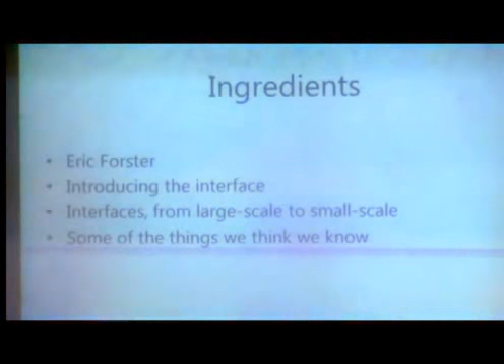These here are the ingredients of my talk today. Very roughly, I need to pay tribute to Eric Forster, so I will start with a short story about Eric, because I had the privilege of meeting him quite some time ago. Then I will introduce to you the interface, at least the interface as I see it, and maybe it's a bit broader description than you would normally have for an interface. Then I will take you on the journey from very large, big interfaces, to smaller and smaller interfaces, and try to describe how our appreciation of these interfaces changes when we go to very small size. And I will end with a listing of some of the things we think we know. So not things we don't know, or things we know, but some of the things we think we know.

But first, Eric. You know, the amazing thing was that it was very hard to find a picture of Eric. Maybe you noticed this is exactly the same picture that Andrea has shown. And for me, it was really remarkable that a person who put such an important mark on our society, you cannot find a picture of the guy. Anyway, we have the picture here.

And for those of you, the younger people here who never met Eric, Eric was really the man on liquid dielectrics. He made a lot of progress in that field, and he worked almost his entire life in industry, but he was also involved in universities. And for me, talking about interfaces, he was kind of the perfect interface between university and industry. Very important, I think, especially in these days now.

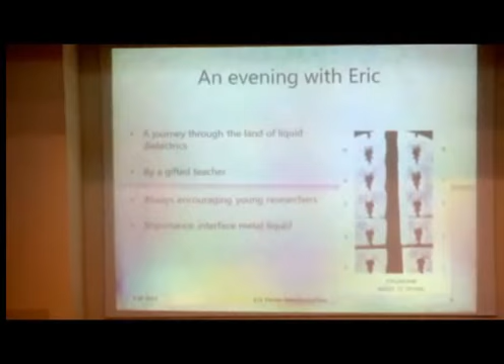When did I meet Eric? I think it was about 25 years ago, in the evening of one of the conferences. It was an evening with Eric. That sounded interesting, so I went there. I was still young at the time.

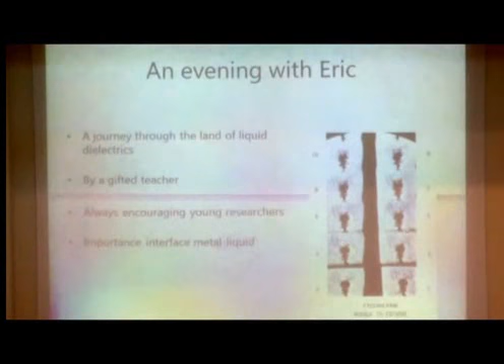Eric took us on a journey through the land of liquid dielectrics, and I was really grasped, like watching an exciting movie. Because he was a gifted teacher, always encouraging young researchers. I still remember when we met, he'd say, oh Peter, we need to talk about this, we need to talk about that, and so on.

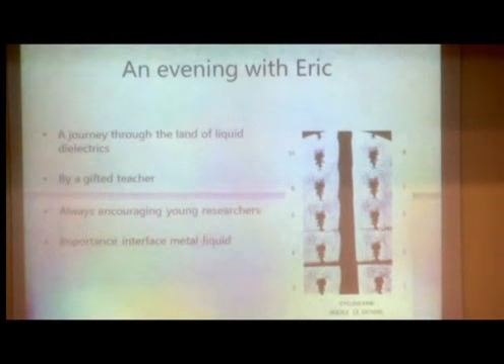He was telling us that evening about the importance of the interface between metals, between the electrode and the liquid. You see some very old pictures of the start of a breakdown process in cyclohexane, a liquid insulating material, with a needle as a cathode.

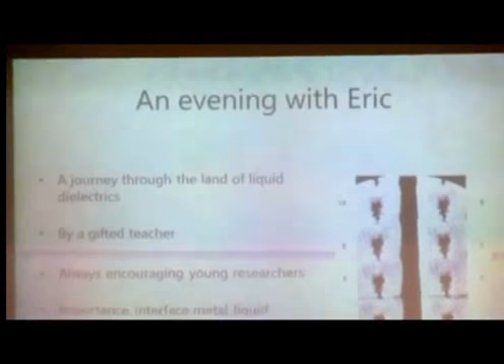After that lecture I was very much excited by the matter, and I spoke with some of the more experienced guys, and they were not so excited. They said, we didn't hear anything new. But I thought, I don't care, because it was the way Eric was the interface between the things in his mind and his audience that really grasped me. He was really able to motivate people. So thank you, Eric, for that.

Now, this lecture, what is it about? As I said, our love-hate relationship with interfaces. I'm going to try to shed some confusion around interfaces, so I hope you won't mind. Then my doubts about what we think we know. I think it's good to have doubts about things, especially if everybody is repeating what other people say. But do we really know?

In 2007, John Fothergill, one of my predecessors, had a list of 10 things we do not know about dielectrics. So I'm not going to copy John - John is, for me, another league. But I want to tell you about 4 things we think we know about interfaces today.

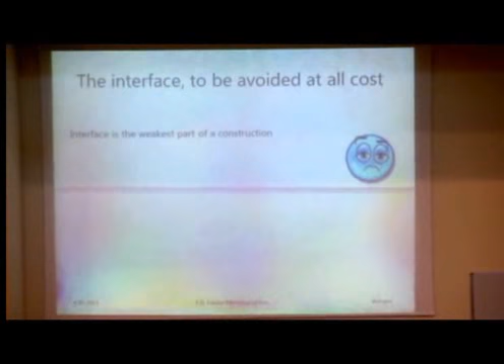Now why is it to be avoided at all cost? Professor Kreuger, maybe some of you still know him, was my teacher, and at the time he said interfaces are the weakest spots in our construction. So you should be very careful in your design with interfaces.

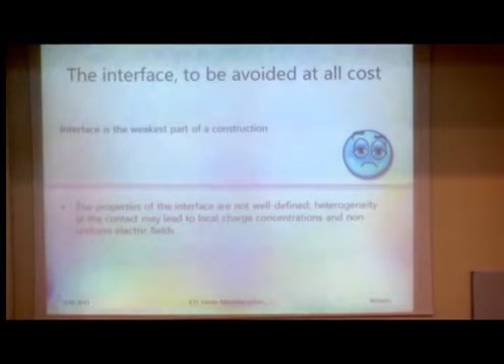Then the properties of an interface - what are the properties of an interface? They are very ill defined, and this is one of the problems here. They're heterogeneous. At the contact we can have local charging, which really destroys the design field we had in mind in the first place. Then heat cycling - in real life we have to deal with heat cycling, which can lead to delaminations, can create defect interfaces.

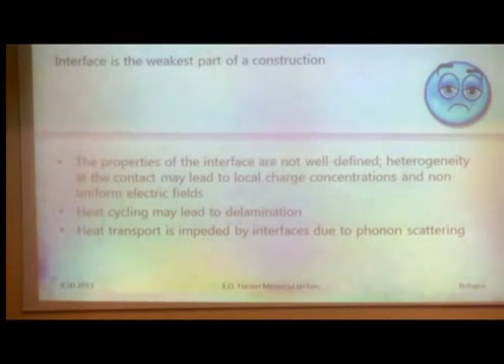I try to make not too much noise here. Yes, it's noisy. Let's try another way. It's nice to have a chairman taking care of you. Oh yes, like a wife. Don't overdo it. You make me nervous now. I don't want to be nervous while standing here in front of all of you. Now it's better, okay.

Let's move on because time is running. Now, another reason why interfaces are a problem in real life, which you might not think of at first, is that any interface impedes the transport of heat. In our components, heat is generated due to losses and we have to get rid of it. Our high voltage components are becoming bigger and bigger, with higher voltage classes, so our components become thicker, making it more difficult to get heat out of solid dielectrics. They're pretty good thermal insulators.

So let's introduce you to the journey. I made a division into three categories. Large-scale interfaces, which is really the size of centimeters to meters. These are the bulky products we see in practice, such as high-voltage cable accessories.

There's one here. It's not so clear, but here you have the cable insulation, and here we have the body of a joint insulating system. This is the place where often we have problems, if any, in a high voltage cable system—at the interface. These interfaces can be quite long, meters in length in HVDC systems. Another example that often poses problems is the interface in GIS insulation, spacer insulators. It's not so easy to design spacer insulators, especially for HVDC applications.

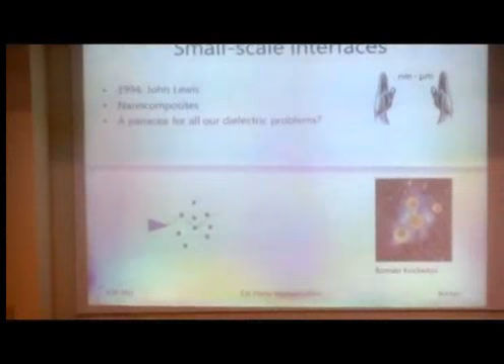Zooming in a little bit, we have the medium scale interfaces—micrometers to millimeters. You can give many examples of this size of interfaces. I decided to focus on defects that we have to deal with in real life, which pose these medium scale interfaces to us, so I'm going to talk about that later. You can think of cavities inside insulation, protrusions on the electrodes that may lead to these nice trees. Small scale interfaces, of course, are nanometer scale and so on.

Started in 1994 already, roughly 20 years ago, when John Lewis spoke about nanodielectrics and the possibilities there. Now we have so many papers at conferences—it's amazing. At the time we thought it might be a panacea, a healing for all our dielectric problems. By now we know it isn't.

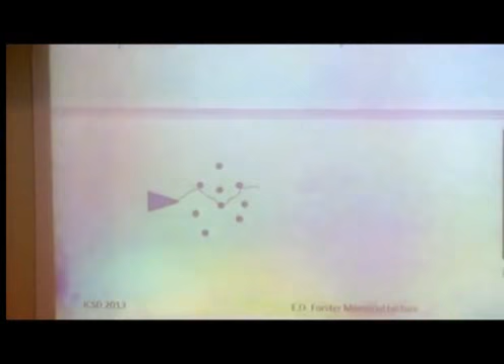You see some pictures here. Let's start here—this is a needle. We think that the right treatment of a medium, putting in the right treated nanoparticles, can hinder tree formation and increase lifetime. This is more like an artist impression from one of my former PhDs who is here, showing how heat is transported through interfacial zones in nanocomposites.

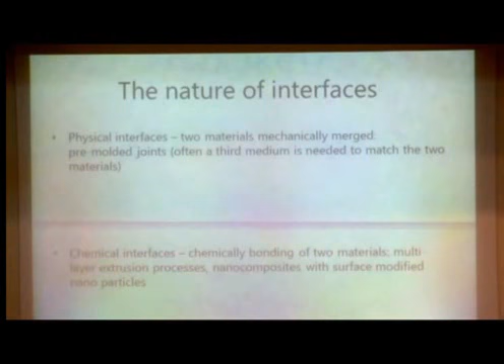Okay, the nature of interfaces—we need to talk about that, because broadly speaking we have mechanical interfaces. You just put two systems together, like in a pre-molded joint in a cable system, maybe interposing a little bit of liquid as a third medium to get rid of voids, just to match the two materials. Then we have chemical interfaces, where we have chemical bonding between two systems—a totally different kind of interface. Looking at the nanoscale, you could consider nanoparticles that have been surface treated to be chemically bonded with the host material.

Now talking about interfaces, we know it's not two-dimensional, it cannot be—it is a three-dimensional concept, especially if you look at it on a microscopic scale. So we better talk about an interfacial zone, or as somebody from Germany said, an interphase, with ph.

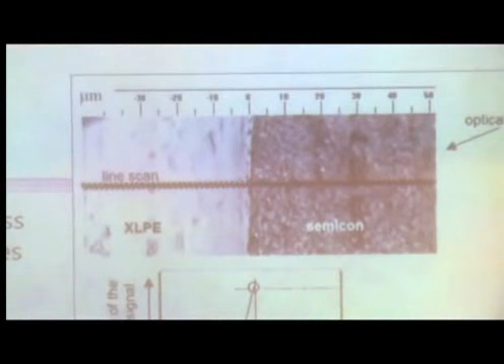Now if you zoom in onto an interface—this is an interface between XLPE and the semicon layer—you see already that it's not such a sharp distinction between the two materials. If you scan from left to right through the system with Raman, you see that the properties only gradually change. So you have an interfacial zone of a number of micrometers in which you go from one medium to the other. In between, you have something that can be, let's say, the average of both materials, but it can also be something with completely different properties from the other two media. And this is interesting.

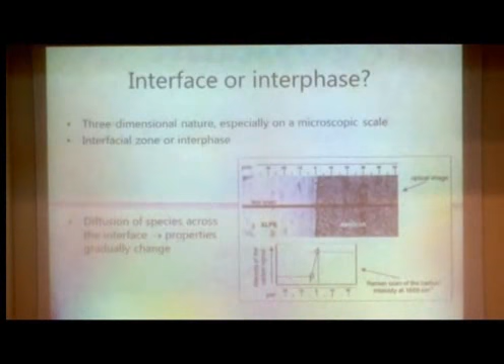Okay, our journey, large-scale interfaces. I want to give you an example of a large-scale interface of which we think we know how to explain things, but where I have still some doubts. As an example, I take an interface in DC cable insulation. It's a very challenging topic. We know that under DC stress, interfaces play a major role in determining how the electric field is distributed.

The question I want to pose: how well can we model the charge dynamics at this interface? I know Len Dissado spoke about that yesterday. I think from his story it was clear that we haven't really reached the answer to everything there.

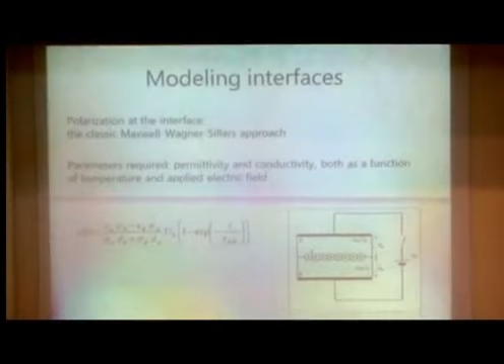Now I want to start very simple. Forgive me, because I like first to look at things by very simple models. So if we have a system consisting of two media, there's this classic theory by Maxwell, Wagner and Sillars, which shows you how you can calculate the charging of the interface if you have access to the macroscopic parameters, conductivity and permittivity. Very basic, very straightforward, but very easy to check. Then you get this exponential growth of the surface charge at the interface between two dielectrics.

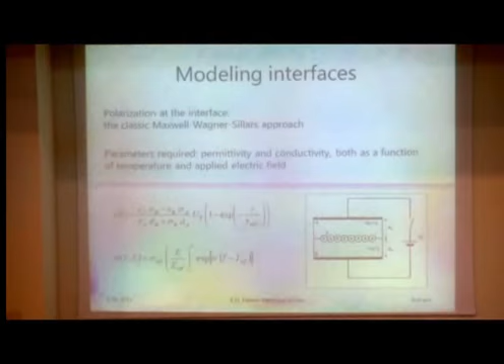Now we know that conductivity is not a constant parameter. It is very strongly affected by temperature and by electric field. So we have to use an equation which, for the conductivity, accounts for temperature and for the electric field. So you do that. What are the results?

For this temperature dependency, you have to do measurements. You can measure the conduction current as a function of temperature, and you plot that in an Arrhenius graph. Usually then you get these nice lines. Here you see the Arrhenius plot for two different materials, EPR and XLPE.

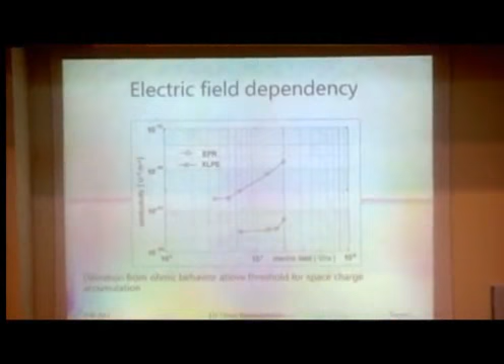These are two typical materials for HVDC cable systems. For the field dependency, it becomes a little bit more complicated. Here you see a plot of the conductivity as a function of applied field. Up to a certain value, we have almost constant conductivity, ohmic behavior, easy modeling. But above a certain threshold field, the threshold for space charge accumulation, we see a deviation from ohmic behavior, and we have to deal with it in our model.

Now we have the interfacial region. If we have a mechanical interface, we have to model in some way the properties of the medium we don't know, the uncertainties. You could introduce a third layer, for instance a silicone oil layer which matches the two media, and use a 3-layer Maxwell capacitor.

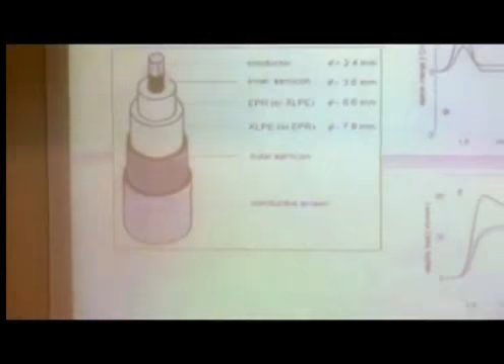Okay, let's have a look at the results. Here are the results of simulations and experiments on a system, a cable where we had two dielectrics, one EPR and one XLPE layer. It's a kind of model for an HVDC cable joint. If you put on a poling field and wait for some time, you have to look at the right column here.

This is the space charge distribution, which grows in time, as you can see here. If you look at the electric field that corresponds, you see that the maximum of the field moves from the inner conductor to the outer conductor. That's the measurement result. What do we get when we model it with our simple model? We get something that looks quite similar.

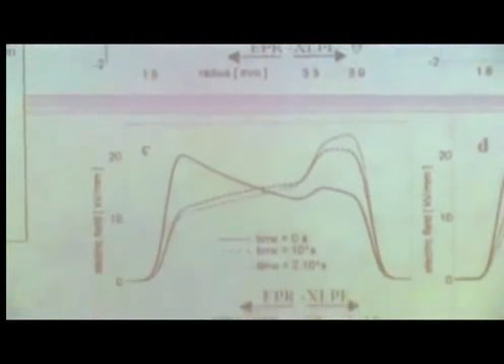So the question now is, can we be happy or satisfied with this as a modeling tool? I would say to a certain extent. Because what happens if we further increase the field? I already mentioned the threshold for space charge accumulation, meaning that at some point in time, at a particular field, the insulation is no longer ohmic in behavior. Well, what do you do then?

You get charge injection, extraction, trapping processes. Len told us all about that yesterday. Here you see the threshold where this happens, obtained from two different measurements: conduction current measurements here, space charge measurements here. And you see for these materials, we have this threshold around 10 to 12 kV per millimeter. It's important because in practice we will always use fields above this value, so we have to deal with space charge trapping.

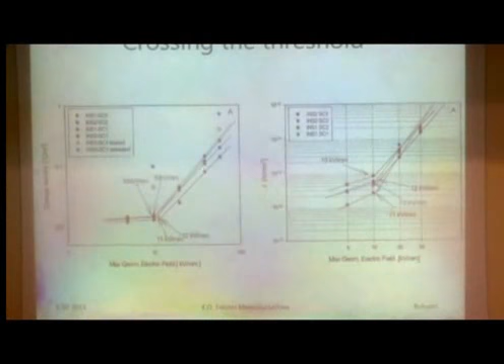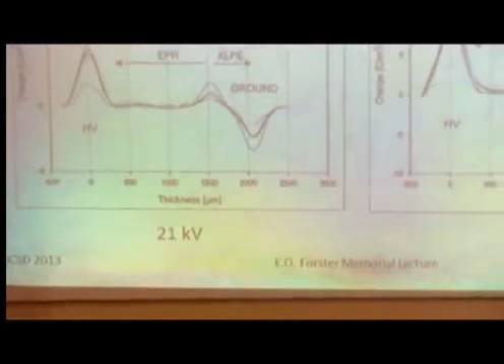To show you that you really have to do that, it's not just theory, I have this example where again we have the system consisting of EPR and XLPE, poling voltage of about 20 kilovolt, then increasing it by a factor of 3. Our model predicts that the amount of charge at the interface would be tripled. Well, evidently it's not. It's even smaller than it was at the lower voltage.

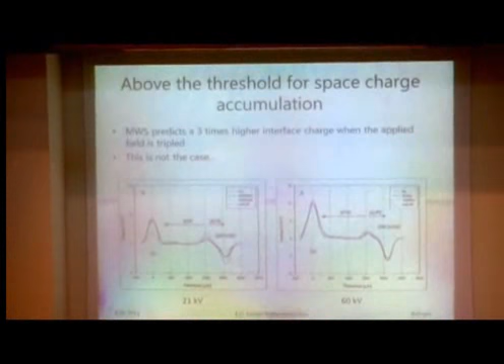So we're missing something here. And what we're missing, in fact, is injection, all the things that Len has been talking about, I see him smiling, all the things that Len has been talking about yesterday. Injection, extraction, charge trapping. But how do you model that?

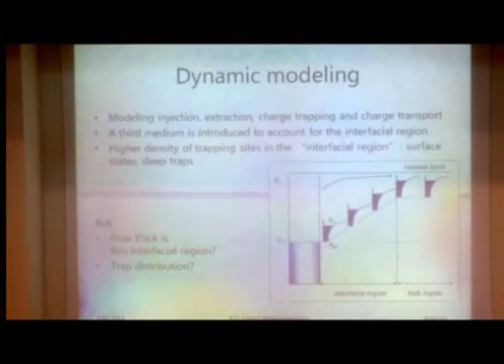You have to assume a number of things. The people in Toulouse assume a kind of third layer if you want to model the charge behavior at the interface between electrode and dielectric. Close to the surface of the electrode, they assume a different distribution of trap depth and trap density than in the bulk of the material, to be able to explain and model the charge behavior. But then you would have to answer things like, how thick is this interfacial region?

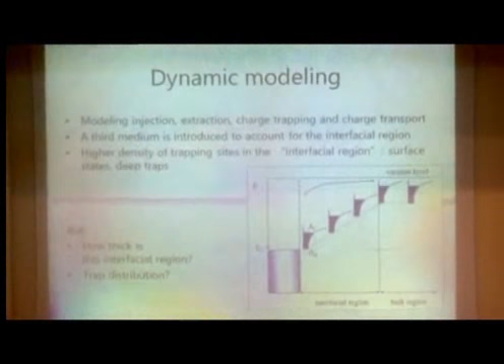What is the trap distribution? In comparing your modeling results with experiments, you have parameters that you can tune, but really, how thick is this region? I would like to see things. So it's not finished yet.

Let us zoom in a little bit further now to medium scale interfaces. I told you I would focus on defects as medium scale interfaces. Defects are, I think, the main source of interfaces at this scale, if we like it or not. An important family of defects consists of cavities, delaminations, or regions of low density.

The question is now, do we really know the route to failure? This is a very old topic. People have been discussing discharges in cavities and how they reach breakdown for I don't know how many years. So I realize what I'm doing here, I'm shedding doubt on something that we all take for granted. But that's just the reason why I'm doing it. So, because this is how we think it works. I would say, correct me if I'm wrong, but we're not going to have a discussion now.

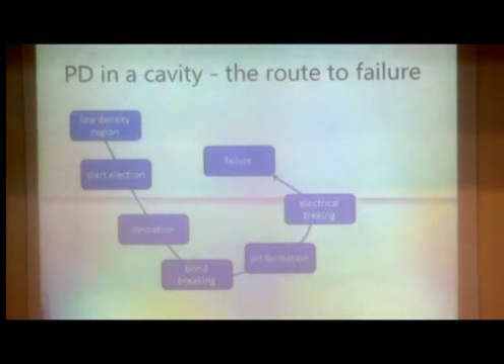So what we think happens: we have a low density region in which electrons can be accelerated, giving rise to ionization, bond breaking when they hit the interface, pit formation, field concentration locally, electrical treeing, and failure. This is the story, isn't it? And everyone is citing others, and they're citing others, and they're citing others. If you follow that path, you go around in circles. You may ask yourself, did we prove all the different steps, the existence of all these steps in reality? I'm not so sure.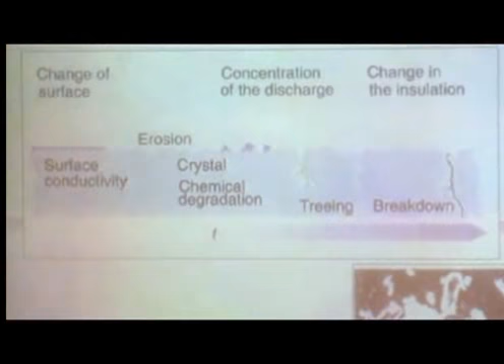So, roughly again, this is a bit of an illustration of what we think happens. Here we see the gas, this is time, this is the dielectric. We see changes in surface morphology, for sure. I saw it many years ago, like discharge byproduct and so on. You see crystal formation, field enhancement. You see partial discharges, focusing on these crystals, points of field enhancement.

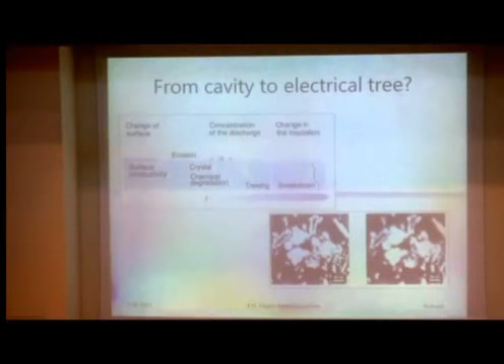We even see pits. This is a picture that I made when I did my PhD. It's the same spot, but focused at two different heights. This one is focused on the surface of the dielectric, where you see the crystals. And this is focused just a little bit below, where you can see a kind of crater going in. And then I wrote, of course, the next step would be treeing. But I never saw it, I never saw it. I assumed that would be the next step.

Because we all know that it's not good to have cavities in the dielectric and they affect breakdown strength, I just assumed, I cited people, who also cited other people, and so on. So there's proof for all stages, except, I think, this very important one.

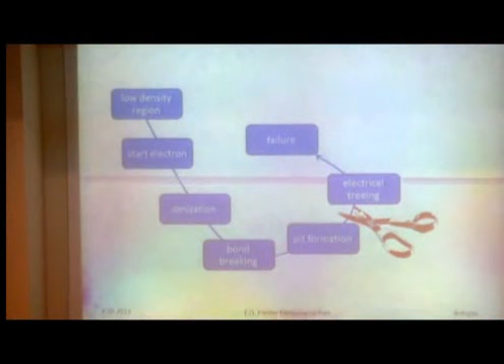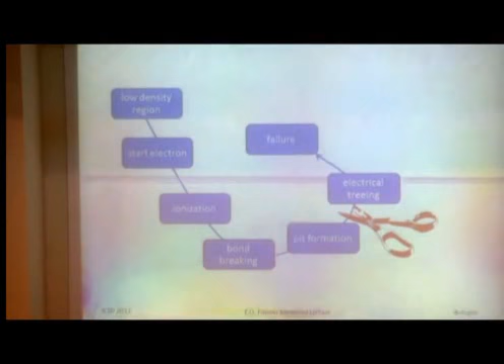So this is what I had in mind. But then, a week ago, when I was preparing this lecture, I was rethinking things, asking should I really say these things? I went back in time in literature. I saw papers of yours, Christian, Christian Laurent did a lot on treeing and so on, and he mentioned other people, so I went further back in time. And then I realized, oh wait, I'm missing something.

First this. Then I arrived in 1952, before I was even born. It's amazing. There was a man who was very famous in our field, John Mason. There's a paper where he showed some photographs, maybe not so very clear. He made an experiment on a flat, cylindrical cavity that we all know, and showed that from the edges of the cavity, things were growing after accelerated aging, after a considerable amount of time. These things looked a bit like a tree, or tree-ish. But this is the edge of an artificial cavity, the kind we would not normally encounter in practice. We would expect more spherical cavities.

But Dr. Mason was quite smart, so he expected that, I guess. This is a picture of a dielectric with a semi-spherical cavity on one of the electrodes. And he showed that indeed there was something growing there on the bottom of this semi-spherical cavity.

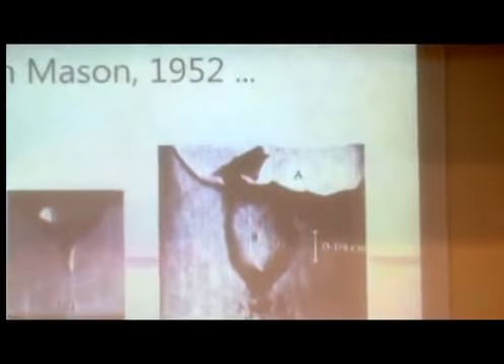Well, is it a tree? It doesn't look like a tree, but certainly it's a degradation process going towards the other side. He was not even satisfied at this point, I think. So in the same paper, he showed this. This is a slice of material taken from a cable that broke down. Here there was the conductor. You can see the conductor screen here. A huge bubble, and definitely a tree on the bottom.

So then I was confused because I already had prepared this lecture. What I'm going to do now, what to do with this information. I knew that all around the world groups are trying to create an electrical tree from a cavity, and I know that they haven't succeeded until now. So my question is, did we find the missing link by just tracing down this old paper by John Mason? Did he really see trees? I don't know. And why was nobody successful in repeating his experiments so far? And if we did find the missing link, why do trees start to grow at much lower fields than required for treeing from a needle?

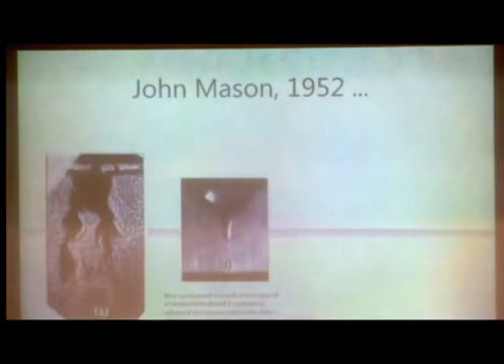Just to explain that a little bit more in detail, let me go back a few slides, because I skipped one on purpose. This one here. We all know that from a needle, at a certain potential, when the field is high enough, we create an electrical tree. And the idea is that a conducting pit at the surface of a cavity also gives us field enhancement, so the precursor for electrical treeing. But let's make a very simple calculation again.

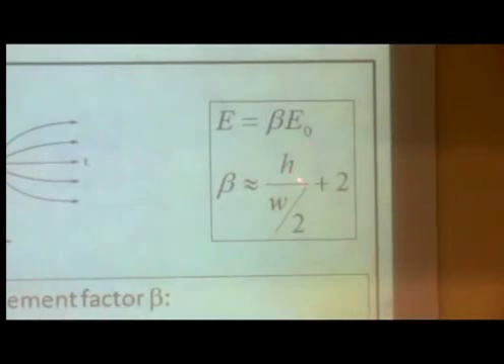I like simple things, as you know now. This is textbook stuff. If we have a protrusion here, the amount of field enhancement depends on the aspect ratio. The larger the aspect ratio, the larger the field. And roughly, this is the amount of field enhancement we have: the length of the protrusion, and this is the radius. Let us assume a needle with a length of 10 millimeter, 10 micron radius. We get 1,000 times field enhancement at the tip. So, easy enough. Now we take this starting cavity, which only has a radius of 10 micron, and we get field enhancement of 3, maybe 10. So normally we would be far away from the conditions we would have at the needle.

So still, I'm in doubt here. What is the exact process? So go back. So I have my doubts here. I think there's work to be done. Now I'm going to zoom in even further to small scale interfaces.

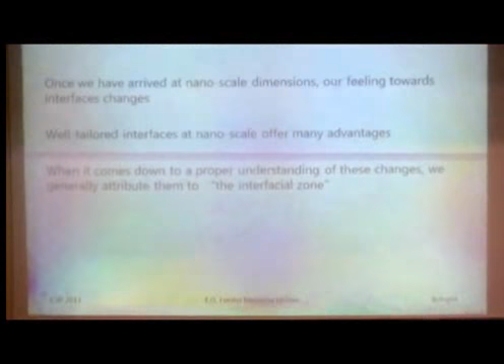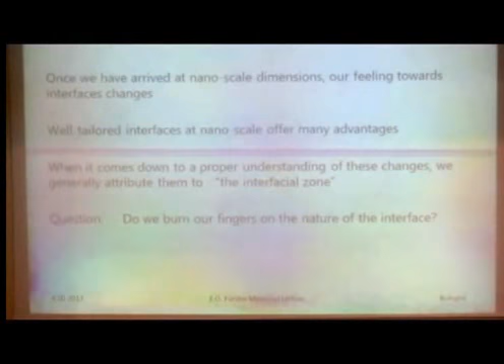And we know now that everything is different, or seems to be different, at nanoscale. Also interfaces. And the interesting thing is that I've said negative things about interfaces that I showed you - the problems we have with charging at interfaces, understanding it, the problems with defects. But now all of a sudden our feeling towards interfaces changes. We think the most beautiful things are possible with interfaces, by tailoring them. And when it comes down to a proper understanding of these changes, we all generally attribute these changes to the interfacial zone, this concept. But what is it? My question is, maybe we burn our fingers on the nature of the interface, assuming so much without really knowing things. Okay, let me explain.

There are a number of models that try to explain our experimental results. First there was John Lewis, then Professor Tanaka, who is here, with the multi-core model. Then from Germany, Stefanie Raetzke had the interphase model. And then one of the guys from my lab, Thomas Andritsch, had this polymer chain alignment model. Let us have a quick and brief review of these models and see what they assume.

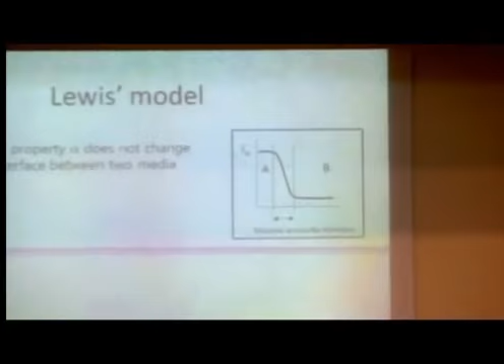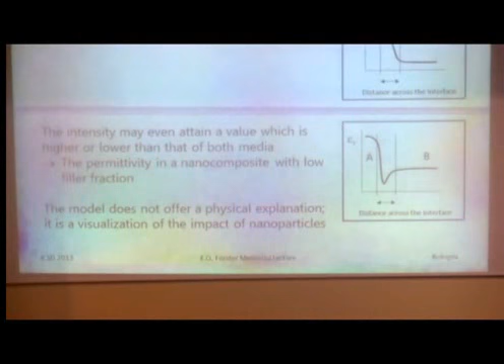Lewis's model - it's basically very simple. It tells you that the intensity of any property across an interface changes not abruptly, as you can see here: property I, alpha, which changes gradually when you go across the interface. And this can be more special. In fact, the intensity can even attain values which are larger or much smaller than both media, which is really exciting. So we create something which is really different from both constituents. The model, however, does not give any physical explanation. It's more like a visualization of what could happen on a nanoscale.

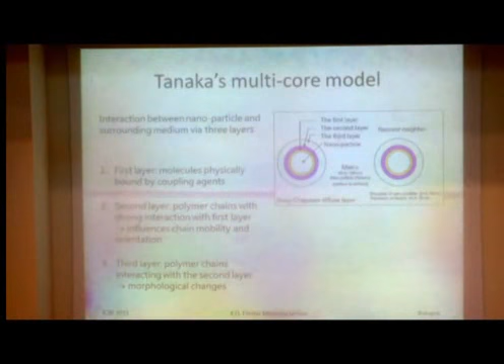If we go to Tanaka's multi-core model, Tanaka tried to focus more on the physics, what's happening really there on a nanoscale. He worked with different layers, where the first layer is really where the polymer is coupled to the nanoparticle, maybe it's just one atom or molecule thick. Then the second layer is the layer where the polymer chains are reoriented in the vicinity of the nanoparticle, and that influences, of course, the chain mobility locally. It's like a kind of cross-linking and the orientation. And then there's a third layer further away where there's less interaction, but still there are morphological changes to be expected.

Now, this model is an excellent basis to start to explain the phenomena that we observe in nanocomposites. But still, it's not the explanation of what we see, of course.

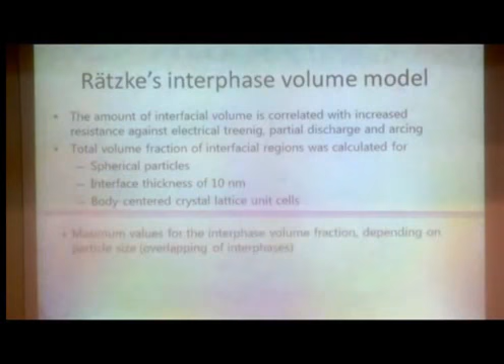Then there was Stephanie Rätzke, who did some interesting things. She correlated the amount of interfacial volume to the change of some properties, like the resistance towards partial discharge, treeing, and arcing. She assumed spherical particles with an interface thickness of 10 nanometers and a body-centered crystal lattice unit cell, and saw something interesting: that you attain maximum values for the interface volume fraction depending on particle size.

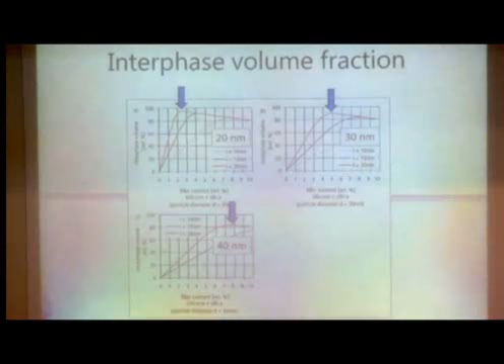You all know, I guess, that there seems to be some magic optimum for the fraction of nanoparticles to change a property. Let me show you. These are plots from Stephanie Rätzke, where the y-axis is the interface volume, plotted as a function of filler content in weight percent, for different size nanoparticles: 20, 30, and 40 nanometers. Follow the red lines, and you see there's a peak in the amount of interfacial volume.

Meaning that if you add more nanoparticles, the interfacial zones are going to overlap, and you don't get any more. There are results, for instance, of relative permittivity, where depending on the fill grade, the permittivity goes down, but above a certain percentage it goes up again. Or breakdown, we have found an optimum for a certain fraction of nanoparticles. Stephanie Rätzke was quite smart in relating the total volume of interface to the change in these parameters.

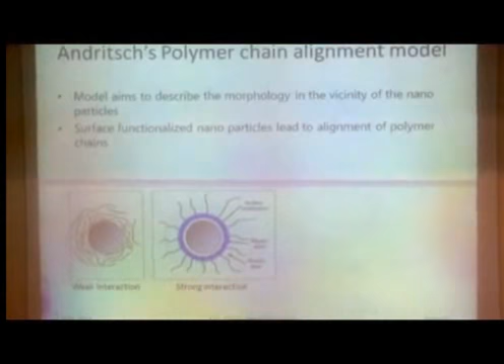Now the last one was Thomas Andritsch with his polymer chain alignment model. Thomas again tried to focus on physics, because Stephanie Rätzke didn't really focus on physics, as you saw. His model aimed to describe the morphology in the vicinity of the nanoparticle, how that is affected. He showed that surface functionalized nanoparticles lead to an alignment of polymer chains in the vicinity of the nanoparticle.

You can see here that this particle has not been treated, and there's a very weak interaction between the polymer chains and the particle, while here, where the particles have been treated, the ends of the polymer chains end perpendicularly on the surface. So you see there's a rearrangement of chains here.

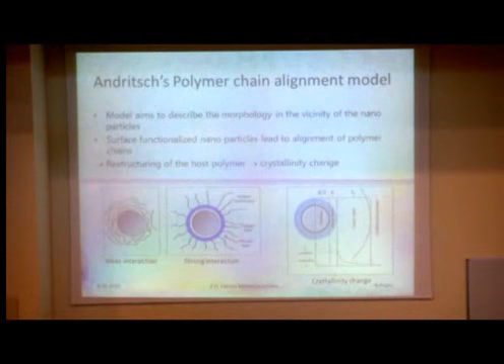And what he said was that due to this rearrangement, you could see this interfacial zone as a zone where we have a changing crystallinity, more order in the material. He claimed that that would be the reason for many of the observed changes. One of these changes is this one here, of course.

Let's see if we can explain this change with any of the models that we have seen. This is the relative permittivity across a broad range of frequencies, for a magnesium oxide epoxy resin nanocomposite. This is the base resin. Now you add high permittivity nanoparticles to this resin and the permittivity drops, which is kind of strange.

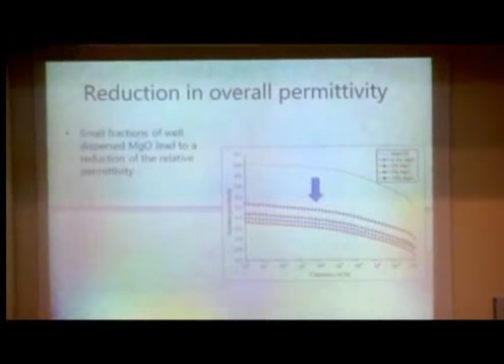People started to model this behavior by assuming that the third medium, the interfacial zone, has a strongly reduced permittivity. So you have a three-phase system which would result in these drastic reductions of permittivity, up to 20%, which is quite a lot. However, for correct modeling, assuming this is the working principle, we would have to assume an interaction of the nanoparticle with the surrounding areas that extends way beyond what we think is possible. So here again we are at a loss.

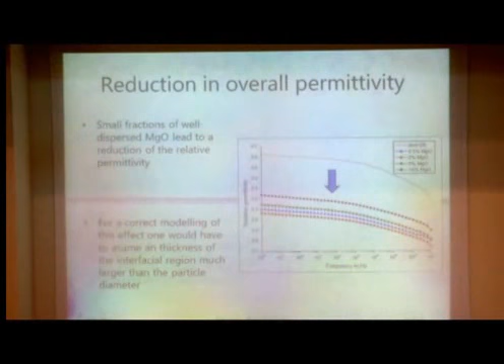That's why I posed a question, I think it was a few months ago, on ResearchGate - maybe some of you know it. I asked, does anybody know how we can visualize or see this interfacial zone? Because I want to see it, I want to see the restructuring, I want to see its extension, because it's important for understanding why we see the things we see. And what is the morphology, what is the thickness?

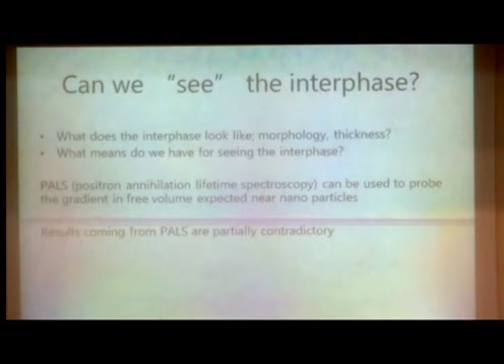So I got a number of answers there. Some people said you should use PALS as a means for probing the free volume around the nanoparticle. So I dived a little bit into that kind of literature, but the results are quite contradictory, so it doesn't really help. If you start reading and then don't look at the contrasting opinions, then you have your explanation. But that's not the way science should be done, of course. So they are partially contradictory.

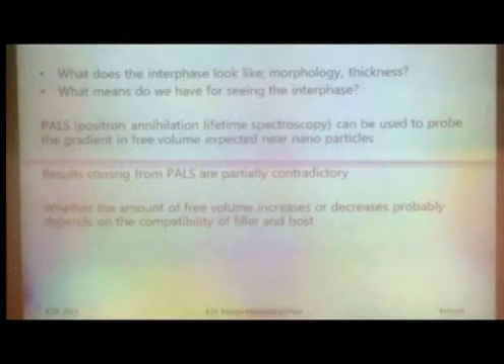Some people see the amount of free volume, from which the thickness of the interphase can be calculated, grow. Some of them see it increase, some of them see it as decreasing. So what to think about that? It is clear, however, that the way we made the nanoparticles compatible with the host material has a strong influence on whether we get an increase or decrease in free volume.

In the end, most studies—though nobody has ever actually seen the interphase—conclude that the thickness of the interphase is around 10 nanometers. But again, that's by far not enough to explain what we see. So there's a lot of work to be done here.

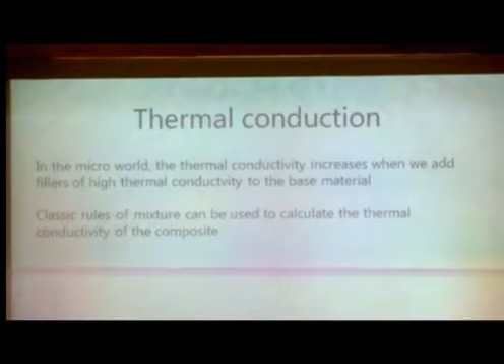A totally different example here. We're still on the nanoscale, very small. Thermal conduction, as I mentioned, is becoming more and more important in our field. In the micro world, thermal conductivity increases when we add fillers of high thermal conductivity. Epoxy resin is always filled, 50–60% silica for instance, to make it cheaper, and to tailor the mechanical and thermal properties. We can easily calculate the thermal conductivity of the composite by classic rules of mixture. No big science there.

However, we know that the effectiveness of heat transport depends very much on the amount of scattering of phonons, the heat carriers, at interfaces and at imperfections. So in the nano world, we would expect a huge number of interfaces to affect this.

Is that me? That's strange. What did I do? It was you. Sorry for that—you need to perform better, I think.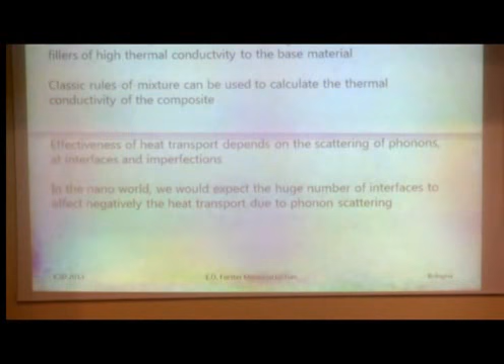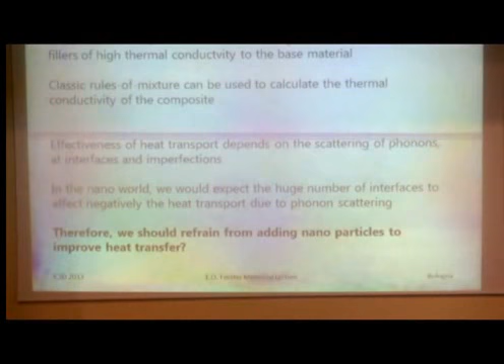So we would expect a lot of scattering in nanocomposites, wouldn't we? So you would think it doesn't make any sense really to add nanoparticles to improve heat transfer from this perspective. But then we are surprised again, as so often we are.

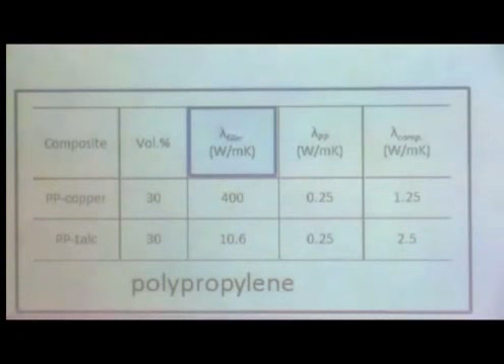So I hope you can see this, otherwise I will tell you what it says. These are some practical results we obtained in Delft. Here we have a nanocomposite, polypropylene as the base material. I'll put my pointer to the left—sorry, I don't have a stereo pointer yet, but that would be nice. We have a volume percentage of 30, that's quite a lot. We have two different fillers: one is copper conductor, which we think would really boost the thermal conductivity, and the other is talcum powder. There's a huge difference in thermal conductivity—about 400 for copper and about 10 for talcum powder. But when we measure the resulting thermal conductivity, we see that the talcum powder composite wins. The resulting thermal conductivity is twice that of the copper composite, which makes you wonder.

Another graph is one we would understand, because here we see a silica epoxy resin composite, fill grade versus thermal conductivity. Blue is nano silica, red is micro silica. We see that the micro composite wins—that's what we would expect, since there's more scattering in the nano composite, so less conductivity.

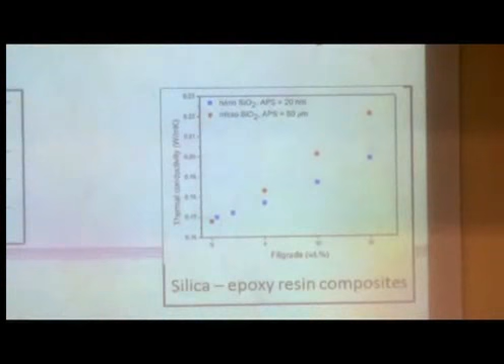However, here in this table we are focusing on an epoxy resin boron nitride nanocomposite. Look at the first row and the last row—these are both spherical particles, but in the first row we have nanoparticles, and in the last row microparticles, at the same fill grade. We see that they have comparable thermal conductivities. This goes totally against, at least, my expectations.

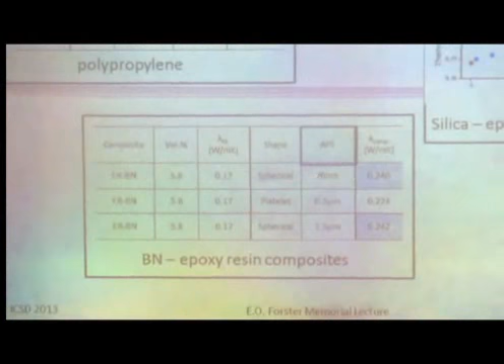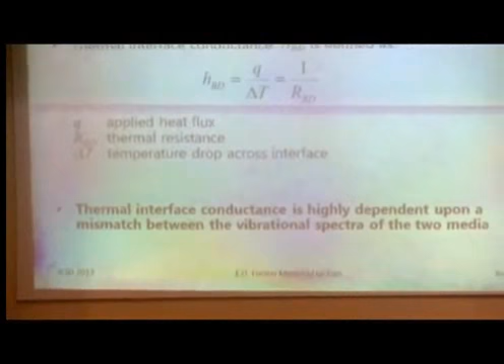So, in order to know a bit more about this, we need to look a little bit at phonon scattering. We know that interfaces—it's a bit strange animation here now—provide added sites for phonon scattering. We can define a thermal interface conductance as the applied heat flux divided by the temperature drop across the interface. This is very important, that's why it's bold. The thermal interface conductance is highly dependent upon a possible mismatch between the vibrational spectra of the two media. Different media have different phonon vibration spectra, and if they're unmatched—totally different, with no overlap—you have a really big resistance for heat transport.

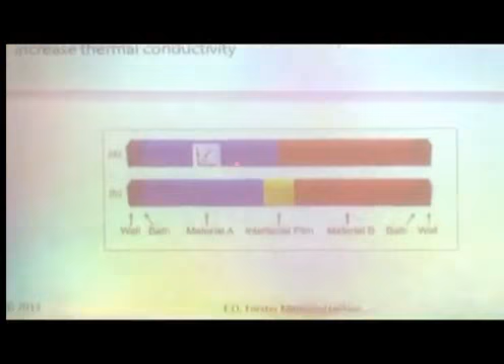Let's have a look—I borrowed something from rather recent literature here, matching the density of states of phonons in the two materials composing the interface. These researchers used molecular modeling of density of states for a range of vibrational frequencies. First they show a mismatch between material A and B. Here we have molecules of material A and material B, and they calculate the vibrational spectra for both. I'll show them to you in a moment. They show that by interposing an extra layer, which normally would be very ineffective for thermal conductivity, in this case it boosted the thermal conductivity. It's like matching the two media on both sides of the interface.

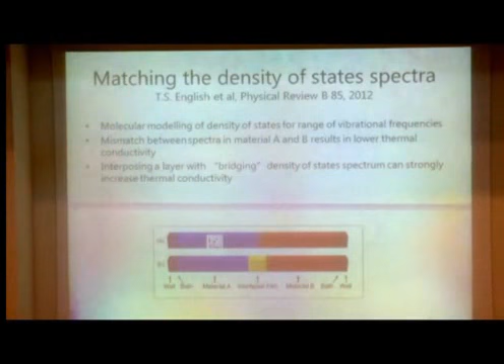In a way, it's quite similar to some of the tricks we use in PEA measurements, where we have to match acoustical properties of different materials. Because here, all the vibrational spectra—this is frequency in terahertz, by the way, and this is density of states—this is the spectrum of material A, this is material B. You see that only here there's some overlap, where there's kind of optimal heat transport. Now, by interposing a layer which overlaps with both materials...

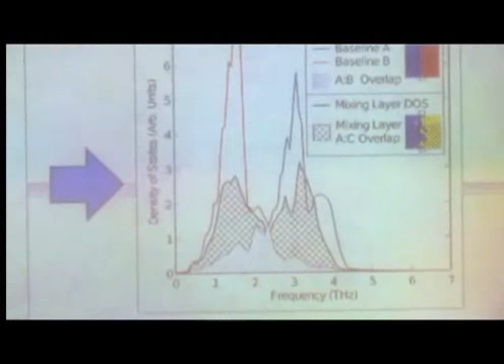They have calculated that we can improve heat transfer by up to 53%. This is very interesting. Again, we need to make different media compatible with each other. The interesting thing is that we can use molecular modeling now to really tailor the interface, because they also looked at the effect of making the interface a bit more fuzzy, more diffuse. It appeared that a certain amount of diffusiveness further improves heat transport. I won't go into details, but you can look at the paper if you like.

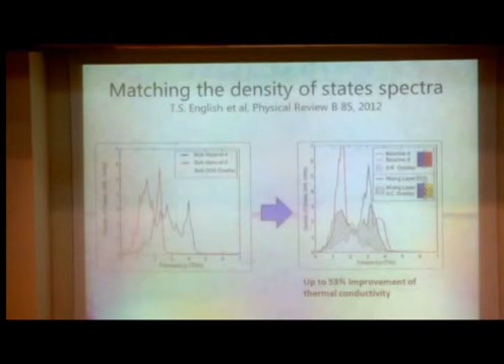Now let's look at experimental results coming from people. Okay, good, so just a few experimental results.

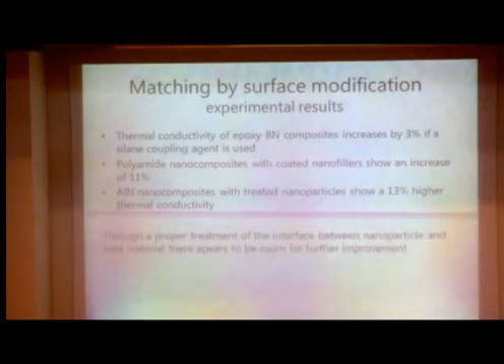Boron nitride treated materials showed an increase of 3% after surface treatment - not so much. Polyamide nanocomposites showed an increase of 11% after surface treatment. Aluminum nitride composite showed 13% higher thermal conductivity. So it really makes sense to do this treatment. It appears there will be much further improvement possible - a lot of further improvement possible.

Now I will skip this exciting topic - the dangerous part - but we can touch on it, it's about liquids. I want to say this: I put it in, this is not a liquids conference, but I think it would be very good if we had some liquids people here to learn from them. Maybe they can learn a little from us too, maybe they won't admit it, but that could be the case. Anyway, that's the next couple of slides, but I will skip them because I'm going to be too over-enthusiastic. But later on, during coffee, I can speak about this.

So finally, focusing in - the idea is that you see the different materials disappearing. Now if we zoom in, we only have the interface zone. And this is exactly what's happening, of course, in the nano world.

So our appreciation of interfaces - these are my conclusions, Mr. Chairman. It's complicated, but what we do not know, we fear, in fact. So much more understanding of nano, of interfaces, makes us able to tailor them in a better way. We don't have to be afraid of them anymore. So whatever the application, proper matching of the two media will bring optimal results, and molecular modeling will certainly help here, as you'll see. We've seen that our appreciation changes, becomes more positive, once we get more into nano, which is nice.

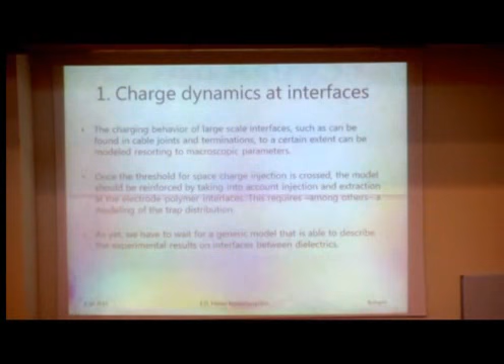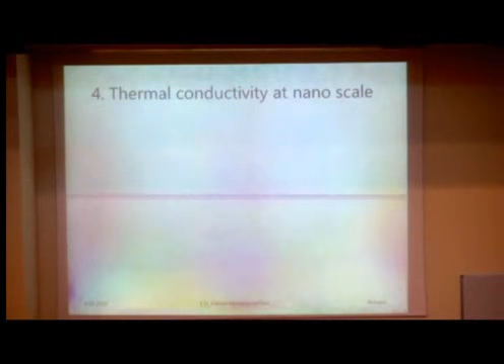So that's one thing we think we know, but I doubt it. Then, from cavity to electrical tree - do I have to explain further? I think you remember what the message was. The nature of the nanoscopic interface - please show it to me, I would like to say. Thermal conductivity at nanoscale - very interesting, and here we can make major steps using other fields again, molecular modeling for instance. I'm sorry, this will stay a mystery for you, I'm afraid.

Okay, I've come now to the end of this short, or rather long, journey maybe. Well, I don't want to stop without having some fun.

Of course, no, I really need to thank quite a number - I'm not going to thank everyone, but some people made life for me very exciting, and really nice, and really motivated me to go on in this field. You can decide who is John, Paul, George, or Ringo - I don't care. But apart from them, there are many more people, but of course my students, some of them are here - the ones that I have now are really great. Last but not least, my teacher, Professor Kreuger, who taught me how to sell things. Well, I hope I sold you something today. Thank you very much.